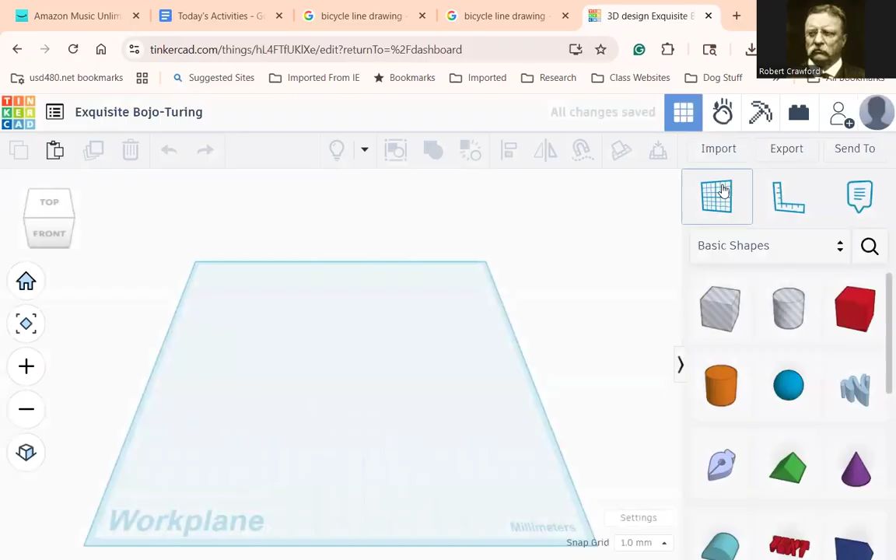Good. Now I'm going to import, choose a file, and I'm going to come up here and find that line drawing object. Open. Good. We're going to leave it in millimeters right now, and I'm just going to go ahead and click on import.

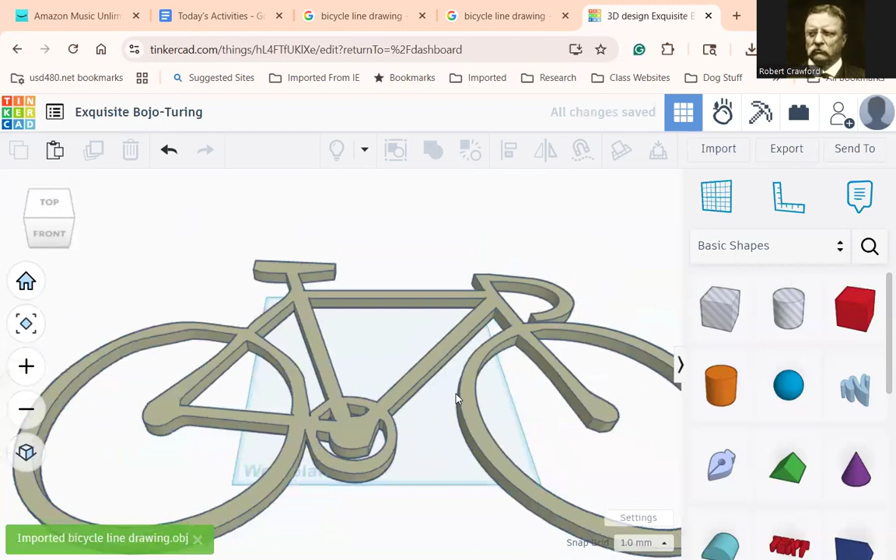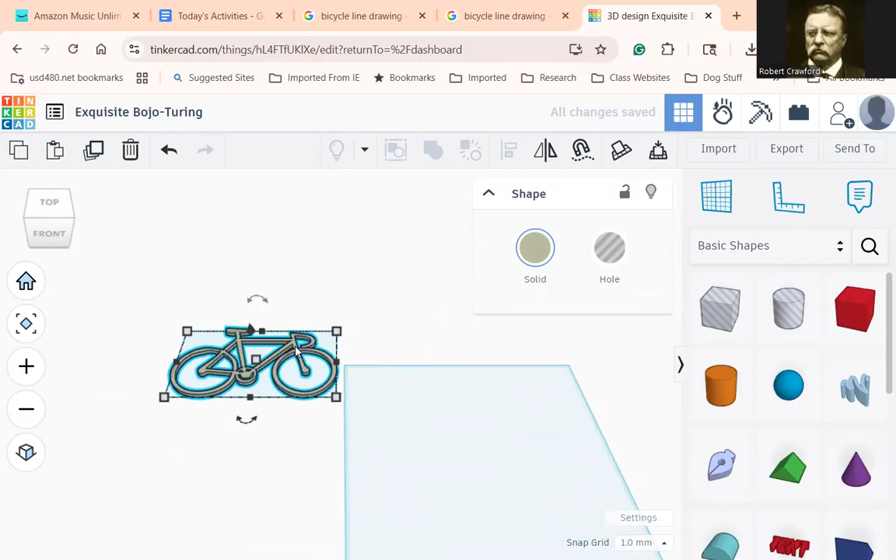Now, this might be bigger than we wanted. I'm turning the red scroll wheel if you're wondering what I'm doing. Now I'm going to click on the object, and now you can see the sizing handles. The trick here is we want to maintain the ratio — we don't want something that looks really warped. So I'm going to hold the shift key down and make that thing smaller. Now I'm going to move it, press and hold on it, and move it onto my work area.

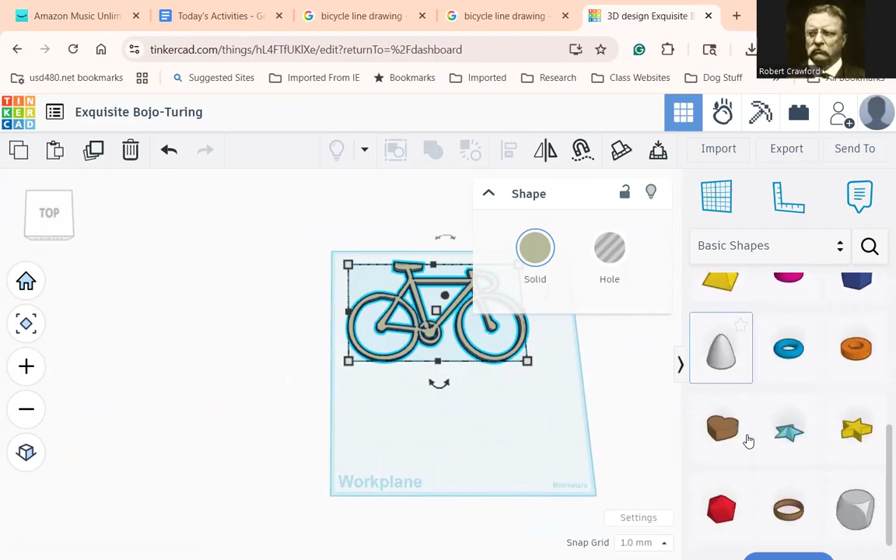Okay, now, what if I want to put this on something? I'm going to move it further out of my way. Let's assume we're making a class token to put on the board. I'm going to grab it, and it's going to be a cylinder — that'll probably work best. So I'm just going to grab a cylinder and drag it over here.

Let's see here, bevel — I am not going to add a little bit of a bevel. I'll explain the bevel later; I'll keep it at 0 right now. I'm going to click on this cylinder here and one of these sizing buttons on it.

Let's say you were told it's going to be a 30 millimeter by 30 millimeter, and I need to move it just a little bit because this thing's in the way — 30 millimeter by 30 millimeter, like a refrigerator magnet. Okay, good, now we got that done.

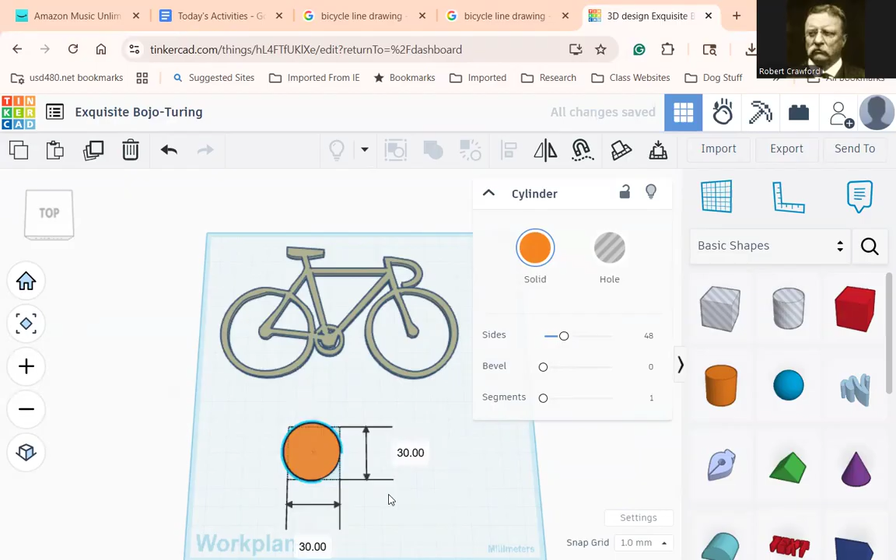We are going to make this shorter, because that's too tall. So I'm going to come over here and click on this one right here, and we're just going to make this thing 6 millimeters thick.

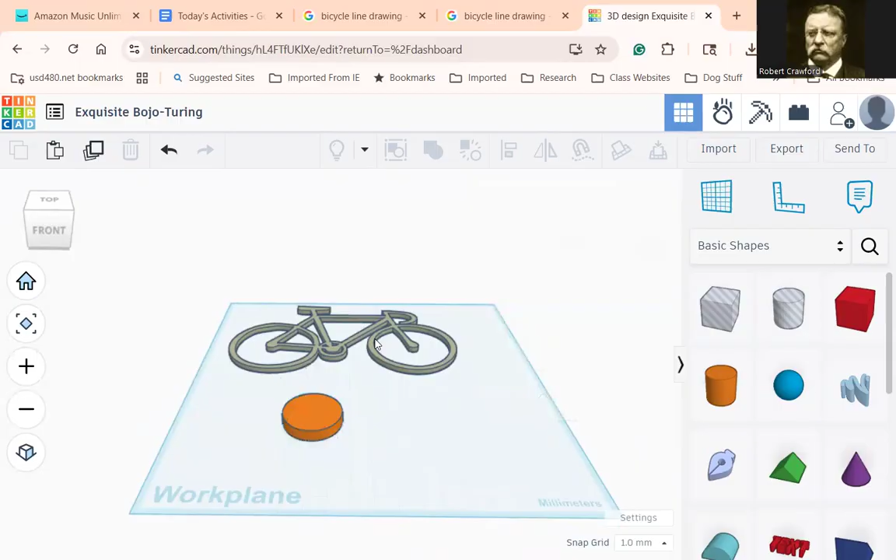Now, our bicycle clearly doesn't fit — yes, it will. The first thing we're going to do is make our bicycle a little bit thicker. I'm going to click on the bicycle, go to this one here — we made that 6, so here we're going to go to 10. Okay, I could have typed in 10.

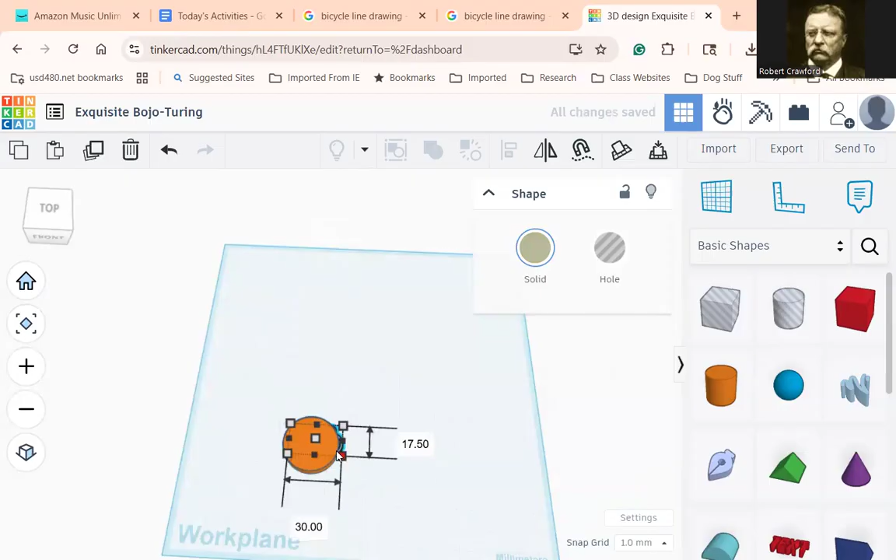Now I'm going to go to the corner here, hold the shift key down, and make that thing a lot smaller, then drag it over. Okay, it looks like I need it to be still smaller. Shift, smaller. Okay.

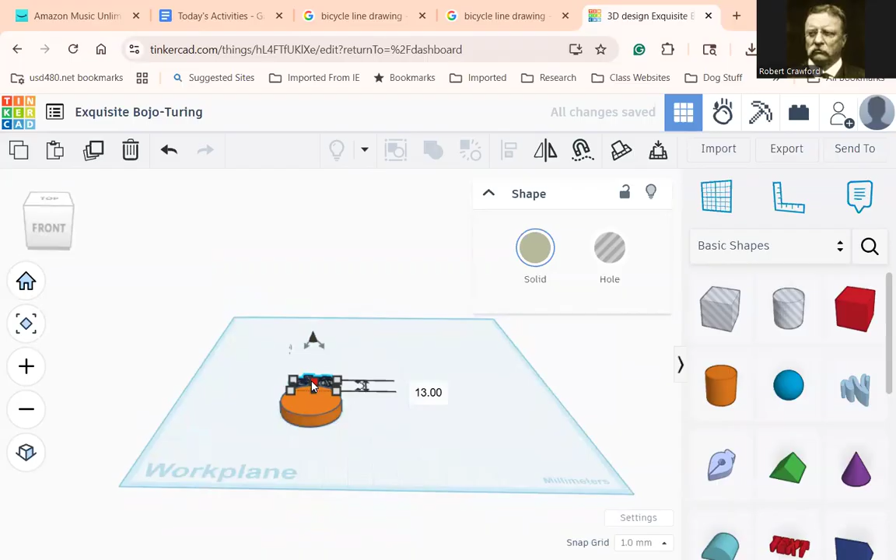It should have been — oh, I know why. I'm going to move it. Now I remember what I did wrong, and I'll tell you guys this: I pressed and held the arrow keys, and that moved it off this thing. What I did is this thing should not be made thinner yet. Basically, we've got it the size we want it.

Now I'm going to bring it into here. Okay, good, now I'm just going to click right there — you see that that has depth now. That was it, so now we have a bicycle on an object.

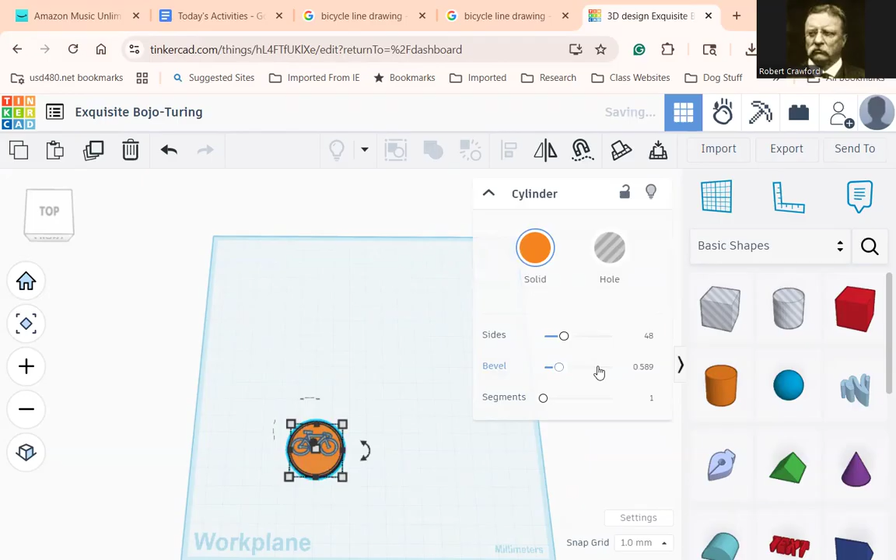Now, again, we can take this round token here and we can smooth those corners a bit. I'm going to go like 1 — I think 1's enough. Now, what that did to show you is it smoothed these corners a little bit. You see how they're sort of beveled now.

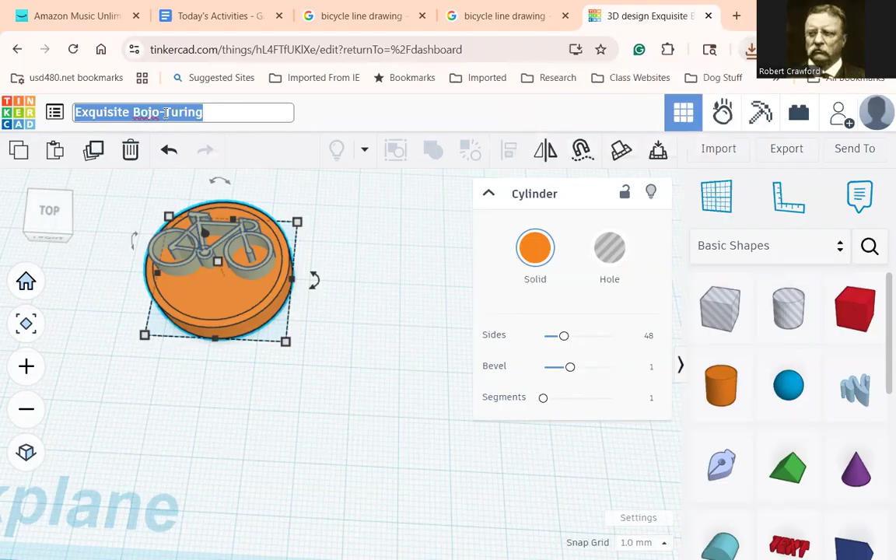Anyways, once you're done and satisfied with that, you're just going to click on Export. Now you're going to click on STL this time, and save it as an STL. Okay, I probably should have given it a better name by clicking up here — example bicycle. Good, now I'm going to export it again with the better name, export, and again STL.

Now at this point I can simply drag this into my slicer. It really was that easy.